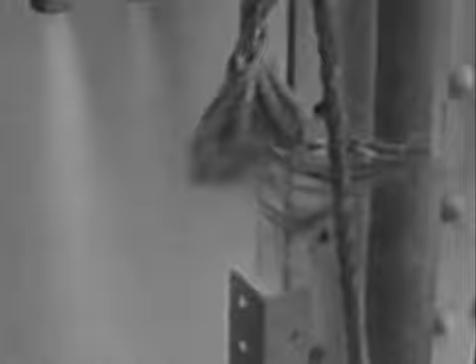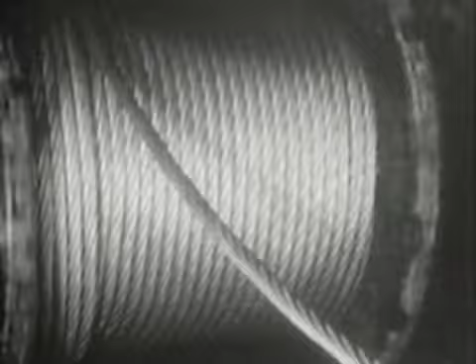Roebling set to work on a solution. His laboratory was the meadow behind the church in Saxonburg. There he spent the summer of 1841 splicing and winding iron wire into a 600-foot-long cable. Roebling's iron cable became a gold mine. Orders flowed in from canal systems, makers of dredging equipment and pile drivers, coal mines, all the evolving technologies that would reshape and redefine America.

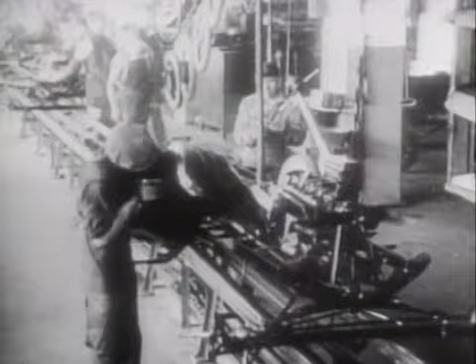In 1844, Roebling won his first real commission as an engineer. 9 months later, he delivered the world's first suspension aqueduct over Pittsburgh's Allegheny River. The aqueduct supported 2,000 tons of water on which floated a procession of canal barges. By 1850, Roebling had built 6 suspended structures. Each depended on Roebling's wire rope, now produced by his own factory in Trenton, New Jersey.

From 1851 to 1855, Roebling was immersed in building a railway suspension bridge over the daunting Niagara Gorge. This bridge proved that a light suspension structure could support the heavy weight of a railroad. Roebling became the greatest bridge builder of his time. His passion for the suspension structure led to its preeminence in America. Today, there are more suspension bridges in the United States than in all the rest of the world.

The appeal of suspension bridges lies in their ability to span great distances without intermediate piers. They also require less material than other bridges. Prior to Roebling, suspension bridges were out of favor because so many had collapsed. But Roebling's bridges never fell due to his scrupulous attention to detail. He was successful at building the bridges because he was a great innovator, but he did it very carefully.

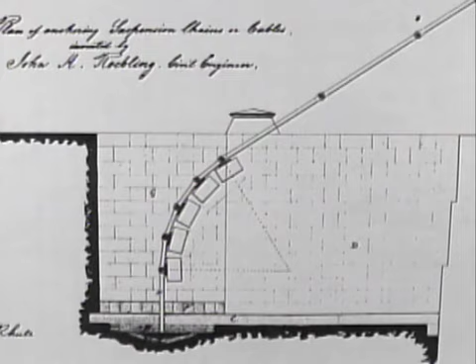Roebling envisioned a bridge with one central span, held aloft by 4 cables strung from 2 towers. The cables were secured to masonry anchorages, 7 stories high and as large as a city block, 1 anchorage on each shore. The bridge would be dominated by 276-foot-high twin towers. Each would contain 2 glorious Gothic arches, over 100 feet high, shaped like elongated cathedral windows.

The structure has a very sacred feeling to it, a sacred dimension to it, essentially because it was built in a very Gothic style that was influenced by, I believe, the structure of churches. Roebling designed a 2-level bridge. The lower level was for vehicles. The top level was for pedestrians. Even today, no other bridge in the world has anything like it.

In this case, no one asked Roebling to build a bridge. He wanted to build that bridge. He felt it was needed there. And his type of bridge would be the most practical, maybe the only practical way to do it. And so he actually came to New York and promoted the bridge. Responding to Roebling's passion, the state government in Albany chartered the New York Bridge Company in December 1867, appointed chief engineer John Roebling, but his project was immediately stalled by objections.

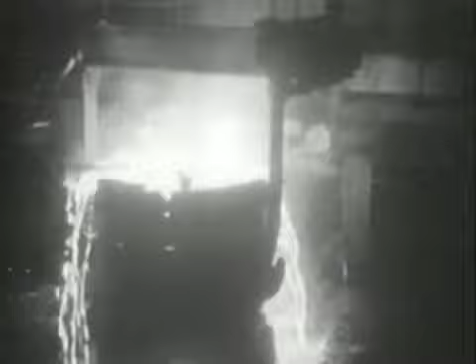Roebling's most challenged innovation was his plan to use steel rather than iron cables. Roebling felt steel would provide stronger support, but no bridge had ever been made of steel, and Roebling, for all his fame and brilliance, was bitterly derided. At 63, John Roebling was fed up with opposition. The Union Pacific was completing a railroad to connect towns and cities from coast to coast.

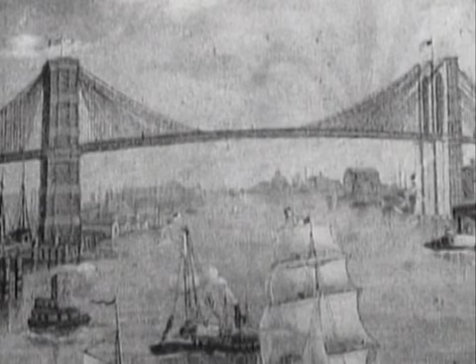Roebling saw his new bridge as the final link in the same transcontinental chain, the eastern outpost of manifest destiny in granite and steel. It was galling that the biggest challenge to Roebling's vision of America came from its own Congress. Roebling had to meet federal requirements, or the work that should rightfully be his noblest or most exalted contribution to the thriving industrial age would be doomed.

The most strident critics of the Brooklyn Bridge were leveled by John Roebling with one brilliant stroke. Roebling, the bridge's designer, led his adversaries on a triumphant tour of his previous triumphs. The critics caved in. On June 21, 1869, Congress granted Roebling the right to build the Brooklyn Bridge. Roebling's plan called for 5 phases of construction.

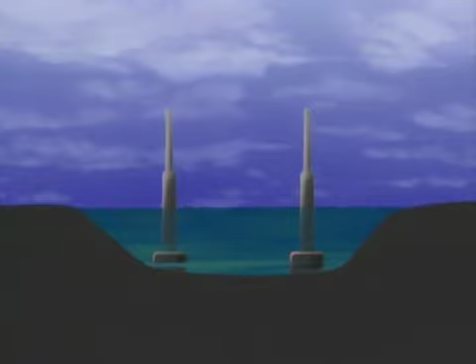First, 2 massive empty boxes known as caissons would be sunk to the bottom of the East River and filled with concrete. The caissons would become the foundations for the second stage, erecting the bridge's twin towers. In the third phase, 2 limestone and concrete anchorages would be built on shore, one in Brooklyn, the other in New York. The fourth stage of suspension bridge construction was the spinning of cables from one anchorage across the tops of the towers to the anchorage on the other shore. Finally, the cables would support a framework on which would rest the bridge's roadway.

While he designed the bridge, Roebling's closest confidant was his son, Washington, his partner in the bridge project. Washington's training as an engineer began at 17, when his domineering father packed him off to Rensselaer Polytechnic Institute in Troy, New York. Washington was working at the family wire mill in Trenton when the Civil War broke out. Next morning, he enlisted. That wartime experience gave him confidence in his ability to lead. He became a colonel on the staff of General G.K. Warren. He fell in love with Warren's sister Emily and grew a beard to please her.

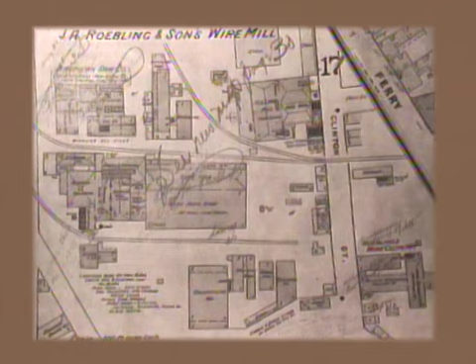To Washington's surprise, his difficult father liked Emily and appreciated her intelligence and devotion, qualities that would prove essential in the battle to complete the Brooklyn Bridge. Washington and Emily were married in January 1865 after Washington resigned from the Army. Their only child, John, was born in 1868. If Washington lacked his father's genius, he was just as much a perfectionist as an engineer.

Both Roeblings began work on the bridge 3 days after they received the go-ahead from Congress. They went to the Fulton Ferry slip to survey the site of the Brooklyn Tower. John Roebling marched about bellowing calculations. When he reached the edge of the ferry slip, he stumbled into some debris and imprisoned his right foot. Just then, a ferry smashed against the slip, crushing Roebling's trapped toes. He continued shouting orders until he passed out. Ironically, Iron John Roebling became a victim of the ferries he was trying to eliminate.

Washington rushed his father to a doctor who amputated the toes without anesthetic by Roebling's request. Roebling then fired the doctor and stubbornly treated his foot with water only, believing water was nature's own remedy. He had a very dangerous situation with his toes. He had to have them amputated. He was going to bathe them in hot water, and that would cure the toes.

Gangrene set in, and tetanus eventually set in. Roebling had committed a typically headstrong act. This time, it was a hideous mistake. Had Roebling obeyed the doctor's orders, he would have lived. Instead, he died of tetanus 3 weeks after the accident. Following the biggest funeral in Trenton history, John Roebling was buried near the wire empire he founded.

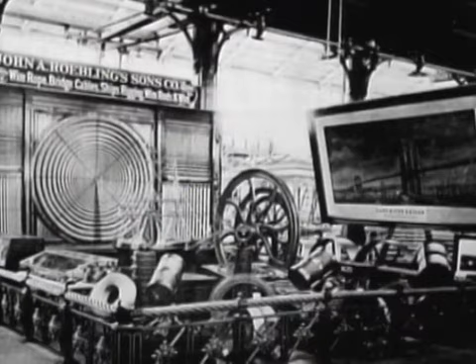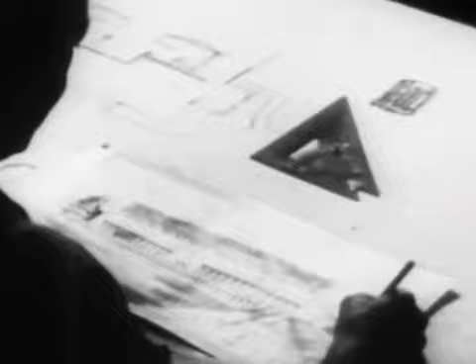Flags flew at half-mast all over Brooklyn. How would the bridge be built without John Roebling, its guiding genius? Only one man was equipped for the challenge, but he would be taking on a gargantuan task that would nearly kill him, too. A month after John Roebling's death, his 32-year-old son Washington was made chief engineer. Except for some bridges he built for the Union Army, Washington had never been in charge alone. Now he would be trusted to implement every untested step of his father's vision.

He was bound to make mistakes, because the Brooklyn Bridge design was so revolutionary, there were no precedents to follow. Without his perseverance, Washington would have been lost. But it was his willingness to work side by side with his men that would prove essential in the first stage of the construction process, the sinking of the pneumatic caissons. The danger of this work could not be underestimated. Washington had studied caissons but never used them. It would take 3 years and as many as a dozen deaths before the caissons were securely in place.

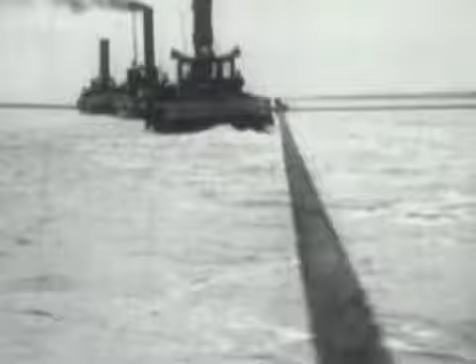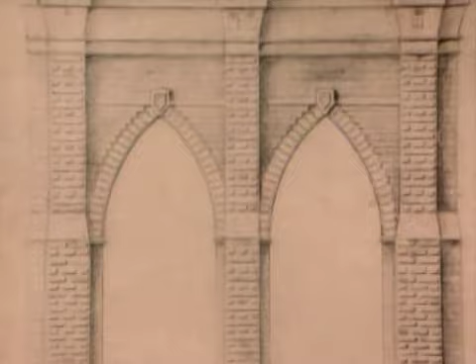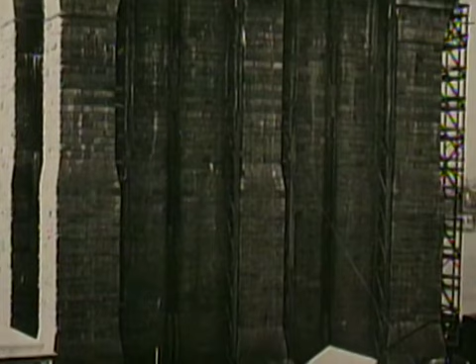On May 3, 1870, the Brooklyn caisson was towed to its site. It cost over $100,000 and weighed 3,000 tons, or 1,000 tons more than the biggest clipper ship of the era. Designed to serve as the foundation for the bridge's massive towers, the caissons were enormous iron-reinforced wooden boxes open at the bottom. First, the caissons would be sunk to the muddy riverbed. But in order to support the tremendous load of the towers, the caissons would need to descend further beneath the riverbed, all the way down to the bedrock of the river bottom.

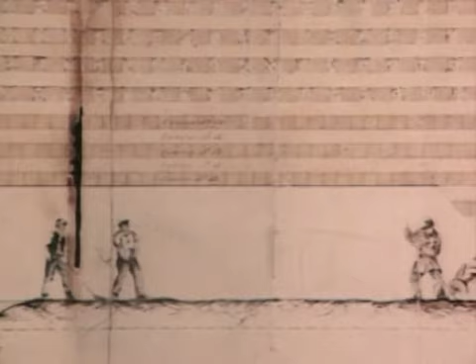The back-breaking work of excavating the mud and rock was laid upon hundreds of low-paid laborers. Workers entered the caisson through an airlock built into its roof. From there, they descended by elevator and ladder into the pressurized working chamber at the bottom of the caisson. Along the rim of the caisson's open base was a cutting edge. The cutting edge was designed to pierce the mud through which the caisson descended. As mud seeped into the working chambers, the men shoveled it into wheelbarrows. The more mud they excavated and shoveled, the deeper the caisson would sink.

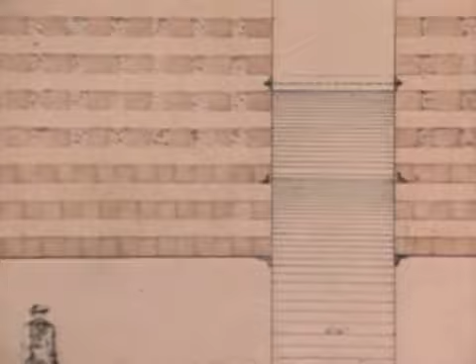The men placed the excavated material in pits at the base of 2 water shafts. The material was hauled up and out by dredge buckets dropped down from above. This process of digging would continue until the caisson reached the bedrock of the river bottom. Life in the caisson was brutal. Men had to perform hard labor in unbearable heat, anywhere from 80 to 100 degrees Fahrenheit. They could barely see what they were digging because any light except the dim calcium lamps would have been too flammable. To most laborers, the working chambers with their deep shadows and confusing noises resembled Dante's Inferno.

The job grew even harder when the caisson encountered boulders. At 20 feet below sea level, the boulders were so thick the caisson seemed trapped. Washington knew there was only one solution: blast the boulders, despite the risk to the caisson's pressurized air. After extensive tests, Washington discovered blasting could be done safely with rifle powder. Excavation speeded up, but the work grew more unnerving.

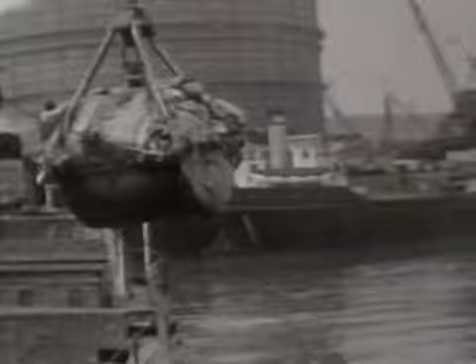Worst of all were blowouts, loud, terrifying explosions caused by changes in air pressure. The so-called Great Blowout occurred one Sunday when an explosion shot mud and rocks 50 feet into the air. Miraculously, there were no injuries because Washington let his men take Sundays off. No one had been inside the caisson. The men escaped this disaster, but still feared being suffocated, crushed, and drowned.

It took 264 workers to man the caisson shifts, yet the work was so dreaded that 100 men quit each week. The workers, Irish, German, and Italian immigrants, were quickly replaced by other immigrants more willing to endure the terrors of the caisson for a steady salary of $2 a day.

Yet, the biggest threat to health was the mysterious malady known as caisson disease, or the bends. Symptoms included vomiting, excruciating cramps, and paralysis. As scuba divers and astronauts who breathe pressurized air are taught today, the bends are caused by excessively rapid decompression. This releases nitrogen blockages into the bloodstream, preventing oxygen from reaching body tissue.

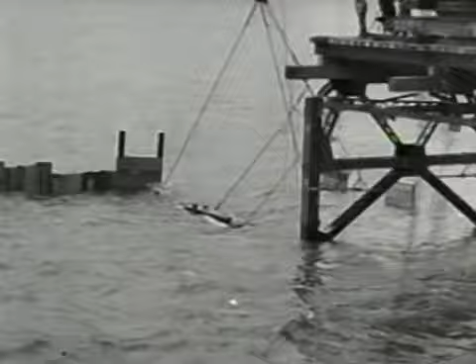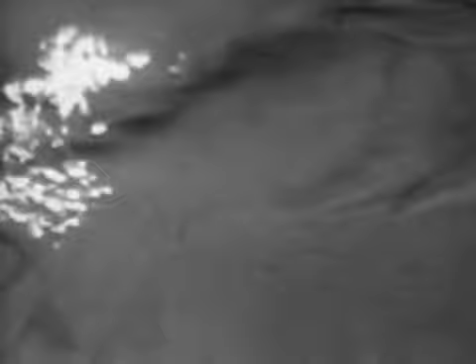By late April, almost a year after launching, the caisson was 70 feet below sea level and still descending. At this great depth, most of the men suffered severely from the bends. Washington reduced the 8-hour work shift to 5 hours, but it did no good. 3 men died of the disease the following week. These were only the recorded deaths. Caisson workers believed there were more.

On May 8, 1872, the entire caisson force went on strike. Yet 3 days later, most men returned, already feeling the pinch of poverty and lured by a raise to $2.75 a day. Attacks of the bends increased. Washington Roebling now feared it would take another year, another $1 million, and another 100 lives before the New York caisson reached bedrock. On May 18th, 3 more men died of the bends.

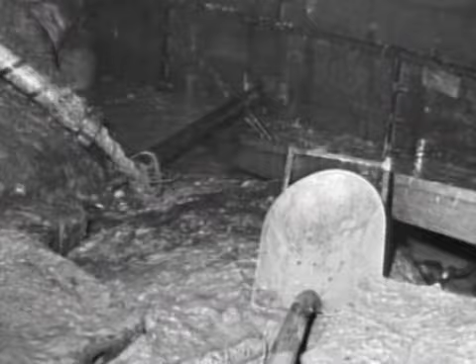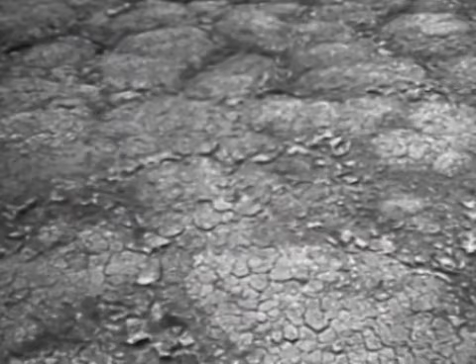That same day, Washington ordered the digging to stop. The New York caisson would rest forever at a depth of 78½ feet on a bed of sand. The decision was less of a gamble than many believed. The sand here was crusted solid, hard enough to batter iron tools.

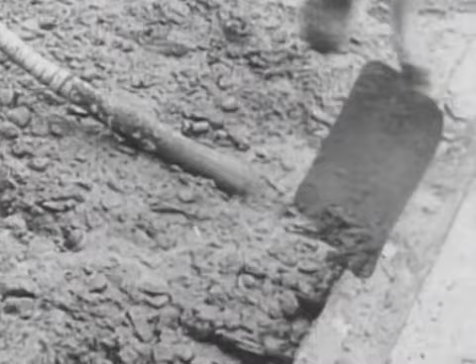A few nights later, after inspecting the concrete poured into the caisson, Washington collapsed again from the bends. For several days he lay near death, but he survived by sheer will and went back to work, where he endured new attacks every week until the caisson was finally finished.

Washington never regained his health. He withdrew to the Roebling home base in Trenton, a permanent invalid. He suffered savage headaches and pains. His eyesight was too dim for him to read or write. Hounded by visions of his own death, he would not return to the bridge during its construction.

Meanwhile, work on the bridge continued. A trusted guardian angel kept the project moving according to Washington's plans. A guardian angel named Emily Roebling. It took 4 years to build each of the strong, massive towers of the Brooklyn Bridge. Beginning in 1871, granite blocks from 20 quarries arrived by boat at the tower docks.

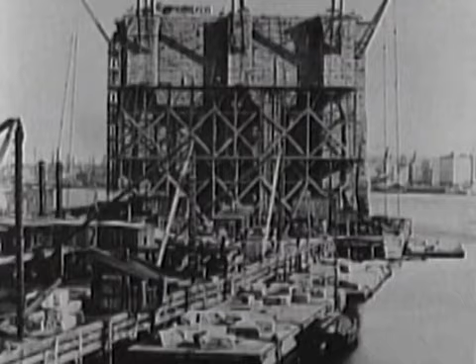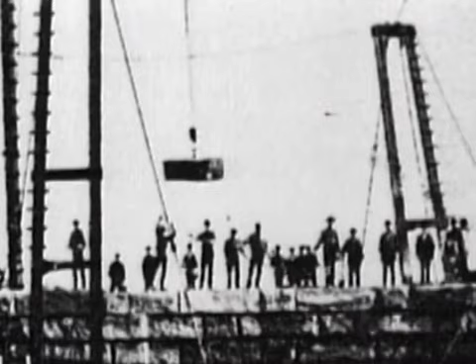Steam-powered derricks hoisted the blocks onto land, and pulleys hauled them into their final position. Vertical wooden tracks along the sides of the towers supported each stone as it made its ascent. The huge towers were 59 feet wide and 140 feet long. By June 1, 1872, when the Brooklyn Tower was 100 feet high, it was still far broader than it was tall, yet it dwarfed every building in sight.

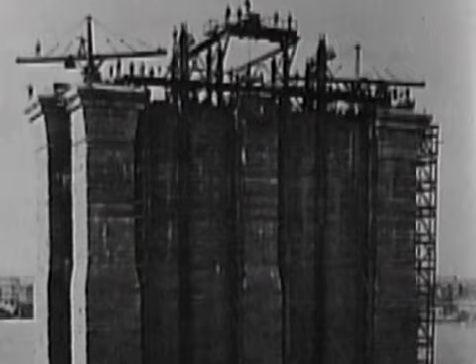The sheer height of the towers made the work hazardous. 4 men died from being crushed by falling stone. 5 others were killed in falls from the towers. The biggest problem of workers on top of the towers was signaling to the men below who ran the hoisting engines. It was too windy for shouting. Fog made flag signals impossible, and signal bells often broke down. Men looking over the edge struggled not to be thrown off balance by sudden gusts of wind.

Despite the absence of the chief engineer, the Brooklyn Tower was finished in June 1875. The New York Tower was ready in July 1876. Standing 276½ feet high, more than 8 feet taller than John Roebling had projected, the Twin Towers dominated the skyline. Their glory could only be imagined by Washington Roebling on his sickbed in Trenton. Not all his symptoms were caused by the bends.

His nervous system had been shattered by overwork and anxiety. Unable to read, write, or tolerate visitors, he was still in constant touch with his assistants thanks to the vigilance of his wife Emily. From 1873 to 1883, all of Washington's letters, charts, and designs were written by Emily.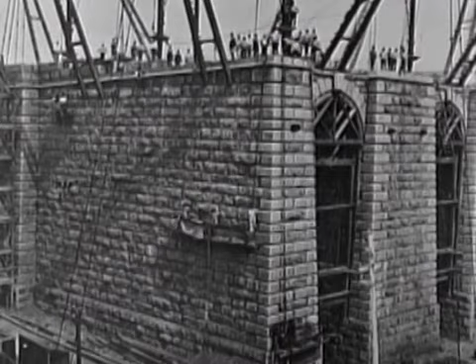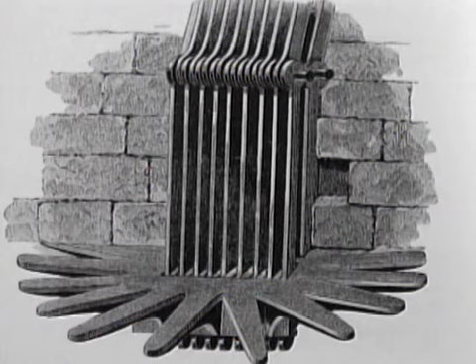With Emily's help, Washington, in Trenton, oversaw the construction of the bridge's anchorages. The anchorages looked like stumpy towers with the same derricks and pulleys on top. Deep in their interior were 4 iron plates, each weighing 23 tons. Attached to the plates were a series of iron bars curving upward through the masonry, ready to anchor the ends of the bridge's 4 main cables.

With the towers and anchorages complete in 1876, workmen prepared the first traveler rope. A 6,800-foot-long loop of steel no thicker than a man's thumb, the traveler would extend over the towers and be secured at each anchorage. Its purpose was to haul the cable wires and spinning equipment back and forth.

At 3:30 p.m., August 14, 1876, 6,000 people watched and cheered as the traveler was hung. New York and Brooklyn were finally physically connected by a single loop of steel. The Brooklyn Eagle ran the ecstatic headline, "Wedded." The New York Herald, playing hard to get, said it was only an engagement as yet. A telegram announcing the traveler's success was sent from the bridge to Washington Roebling in Trenton. The sender was Frank Farrington.

Farrington was the master mechanic, and in 1876 they decided that he was going to cross the bridge and become the first person really to go from one tower to the other. On August 25th, Farrington was strapped into a bosun's chair looped to the traveler, which was shunted from Brooklyn to New York by steam-powered pulleys.

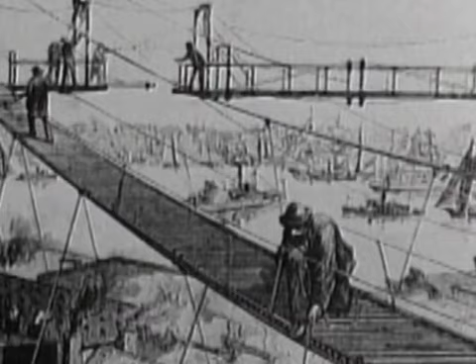The main reason for Farrington's ride was to demonstrate the safety of the traveler to untrained workmen. Unable to find experienced bridge builders, Farrington had hired sailors who were at least used to working at great heights. One of their first tasks was to construct a 48-inch wide temporary footbridge that hung between both towers.

The flimsy footbridge was intended for the workmen, but it became a huge tourist attraction. Thousands of ordinary visitors got passes to cross the river by footbridge. Some found it a harrowing experience, but amazingly, no one was hurt.

If tourists were thrilled to be part of the bridge, Washington Roebling was tormented to be in Trenton now that his dream was becoming a reality. Throughout 4 years of agonizing pain, he had not once seen the bridge he lost his health to create. But now the cable spinning was about to begin. Cabling, the work he liked best, would make this a real bridge at last, and Washington Roebling could no longer stay away.

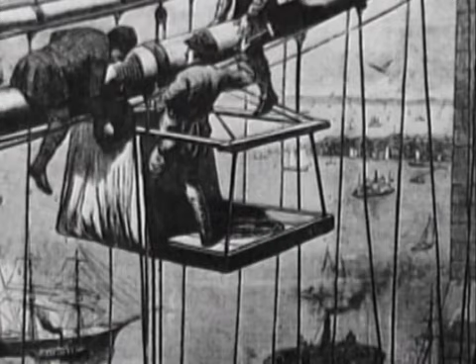In October 1876, Washington and Emily Roebling returned to Brooklyn by boat. Washington was too frail to go to the site. His view of the bridge was limited to the range of his binoculars as he peered from the window of his new house a half-mile from the Brooklyn Bridge. Although housebound, Washington continued to manage the building of the bridge thanks to his direct link to the construction process, Emily.

Once Washington was incapacitated and unable to personally go to oversee the construction of the Brooklyn Bridge, she would go to the bridge for him, and he would simply watch the construction from his window, which I believe was situated somewhere over here in Brooklyn Heights, where he lived. And she would actually go to the site and bring his orders to the workers so that the bridge could be completed.

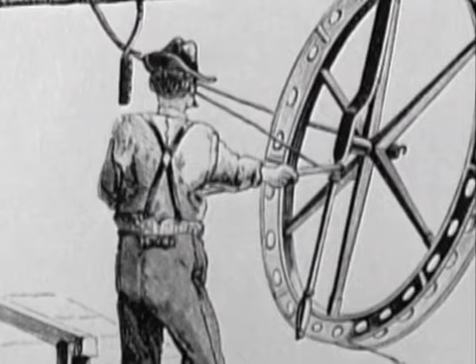With Emily at his side, Washington supervised the spinning of the bridge's cables. The process was called spinning because a wheel, as in spinning wheel, carried the wire back and forth across the river. It looks as if it's being spun. There's a wheel that carries the wires across, and the wheel turns, but the wires are straight.

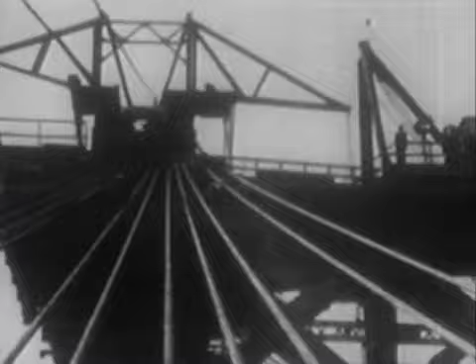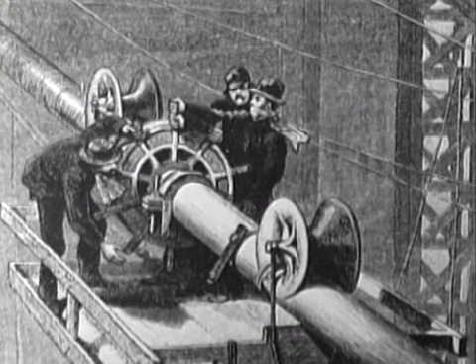They're all parallel wires, and they're picked up at one end, brought over to the other end, taken off and put on the anchors. A compressed bundle of 282 parallel wires was called a strand. There were 19 strands, or 3,500 miles of wire, in each of the bridge's 4 cables.

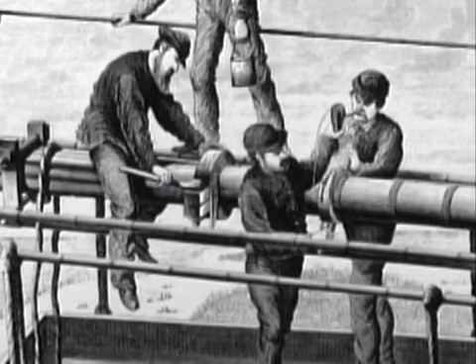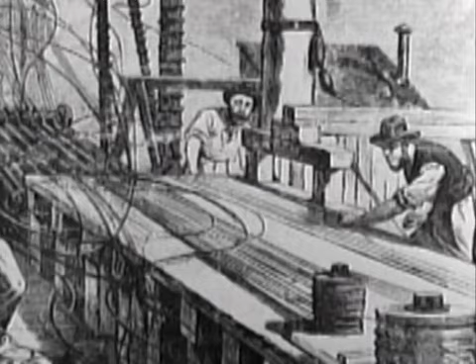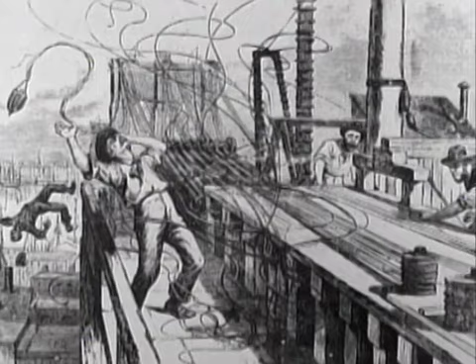Fastening the strands to the anchor bars was the most dangerous part of cabling because of the 75-ton strain on each strand. On June 14, 1878, Frank Farrington and 4 others were attaching a strand at the New York anchorage when a steel rope holding the strand snapped. It killed one man instantly and flung another, who later died, 80 feet into the yard. Newspapers blamed Washington because the rope was a Roebling product, but the rope was not defective.

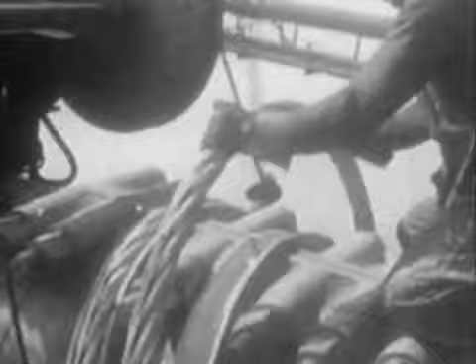However, defective metal was used on the bridge. It was supplied by a Brooklyn wire maker, J. Lloyd Haigh, who manufactured all of the 7 million pounds of wire in the strands. In July 1878, Washington announced that Haigh had bribed inspectors and replaced good wire with bad. Fortunately, the bridge was designed to be 6 times stronger than needed. Washington felt it was still safe, but he insisted that Haigh supply good wire to make up for the bad wires already in place. Haigh agreed and was never penalized for this fraud. Washington had to accept that.

His one-man rule had ended in 1874 when the bridge was redefined as a public work run by a board of trustees. Construction costs were paid by the city of Brooklyn and not paid by the city of New York, which by mid-1877 owed $500,000 to the bridge. Claiming the bridge was unsafe, New York shrugged and said, "So sue us." The bridge trustees had no choice. In the fall of 1878, they ran out of money and filed suit. The courts forced New York to pay up in May the following year.

Meanwhile, building continued but moved slowly due to bureaucratic delays. In 1879, steel suspenders were hung from the cables. It would be another 2 years before the 8,000-pound steel floor beams were all in place. So little work had remained, yet it had taken so much time. Deliveries of supplies were way overdue, perhaps because payments were too. It took all of Emily Roebling's tact to keep the project moving. Possibly her greatest skill was being able to calm people's emotions. Whenever there was some turmoil coming in, she'd go over and talk to them, make them feel good, that sort of diplomacy.

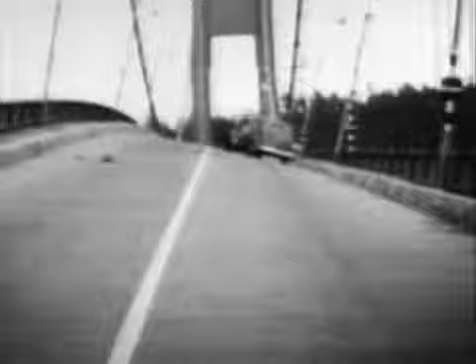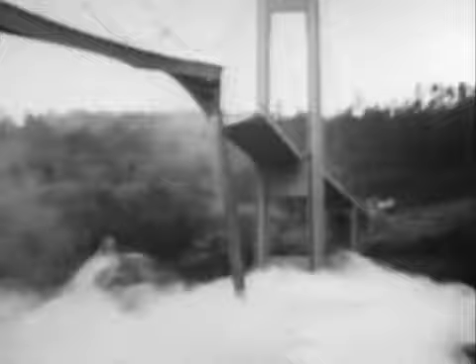In late 1881, Washington asked the trustees for another 1,000 tons of steel to stiffen the roadway. An uproar ensued. The bridge had cost $13,500,000, more than twice the original estimate. Washington's request seemed outrageous, even to engineers. In fact, well into the 20th century, engineers were still trying to economize on steel and were building unstable bridges. This was illustrated in 1940 when a 45-mile-an-hour wind lifted the Tacoma Narrows Bridge in Washington State to its dramatic destruction. History proved Washington right. Without more steel, the bridge's roadway would not have been stiff enough to carry the automotive traffic that arrived in the next century.

But in 1881, additional costs were intolerable to trustees who had no loyalty to Washington Roebling. Half the board had never seen him. None had seen him in the past 8 years. His sanity was viciously attacked. Washington Roebling's job was in jeopardy. Never before had so many powerful people, including the mayors of New York and Brooklyn, sought his exit from the project.

By 1882, Washington Roebling's 13-year battle to build his bridge had wrecked his health, sapped his energy, slandered his reputation, made him a recluse, and the Brooklyn Bridge still wasn't finished. But the roadway was in place, and in June, the state legislature ordered New York and Brooklyn to pay whatever it cost to complete the bridge as Washington requested. But the political candidates on the Board of Trustees wanted to win votes by having the bridge open before the upcoming election. They required Washington to appear before them to be admonished.

He refused. He wrote the trustees that the bridge wouldn't be ready until 1883. Then he and Emily left town for their first vacation in 5 years. They went to Newport, Rhode Island. Seth Low, the mayor of Brooklyn, was outraged. If Washington Roebling couldn't or wouldn't open the bridge this year, why not get rid of him? In July 1882, Seth Low arrived at Washington's home in Newport, unexpected, unwelcome, and certainly uninvited.

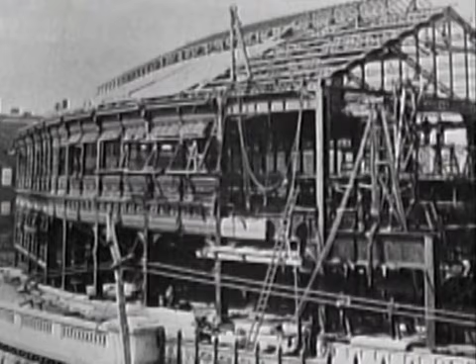In 1883, Washington felt well enough to be driven by carriage to the half-finished Brooklyn terminal in person. He made his observations from the carriage window and stayed inside the vehicle. By early May, Washington was ready to test the effect of a trotting horse on the roadway. Washington gave Emily that honor. As people cheered, Emily and her coachman became the first people to cross the Brooklyn Bridge. Inside the carriage, Emily held a rooster as a symbol of victory, but she was the one who deserved to crow.

It had taken more than 14 years, nearly 40 lives, and over $15 million, but the Brooklyn Bridge opened at last on May 24, 1883. It was decreed the People's Day. The entire city celebrated mankind's capacity for invention embodied in this wondrous bridge, leading from the limitations of the past to the infinite possibilities of the future.

The day began with a parade of 7,000 dignitaries, headed by the guest of honor, President Chester A. Arthur. They called him the Apollo of America here. Good-looking man in terms of that particular time, and everybody turned out to see him. The other interesting person was the governor of New York, Grover Cleveland, who later became president. And then they came down to this Manhattan end of the bridge here, where the president got out and walked across the bridge to meet Mayor Seth Low of Brooklyn.

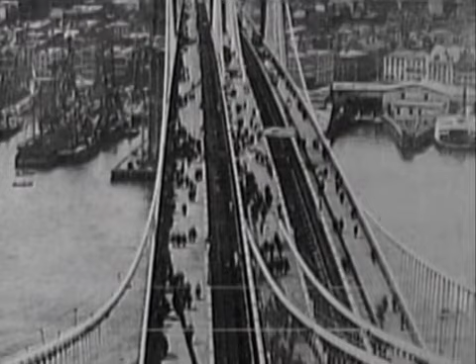Afterward, over 150,000 people from every walk of life were welcome to stroll across the bridge for the price of a penny apiece. The only person of consequence who stayed away from the bridge was Washington Roebling. He watched the events from the window of his home. But Emily insisted that Washington receive his proper acclaim. That afternoon, she hosted a private reception. President Arthur, Governor Cleveland, and 1,000 other guests came to the Roebling home to honor the bridge's founding family.

Through struggle, suffering, and sacrifice, Washington and Emily Roebling breathed life into the child born of John Roebling's genius, then clothed it in steel and granite to fulfill its destiny as the greatest engineering work of its age. On May 25, 1883, Washington and Emily left for Newport. Within 6 weeks, Washington resigned as chief engineer. He'd invested a full third of his life in building the Brooklyn Bridge. He never wanted to build another.

Instead, he built Emily the mansion of her dreams in Trenton. She fulfilled another dream when she became a lawyer a few years before her death at the age of 59 in 1903. Washington outlived her by more than 20 years. At 84, he took over the Roebling wire empire, making it the biggest, most prosperous in the world. He stayed on the job until his death 5 years later in 1926.

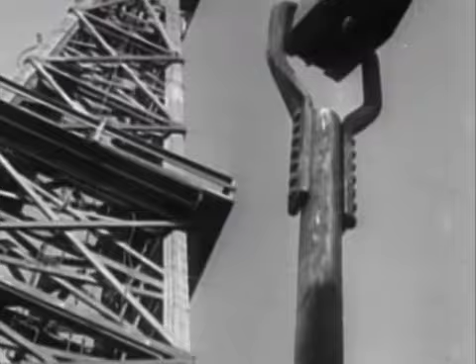It took 14 years to deliver the Brooklyn Bridge, years that coincide with America's emergence as an industrial leader and a beacon of hope, a miracle of timing. Had the bridge been completed 7 years before on schedule, it would have lacked the later technology that prepared it for the long cycle of service ahead. Had the bridge been abandoned until the next century, it could not have become a soaring symbol of faith to welcome the great wave of immigrants who came to America in the 1880s and 90s. In its superb timing, as in all its proportions, the Brooklyn Bridge forever entwines the solid fulfillment of technology with the eternal yearning of the spirit.